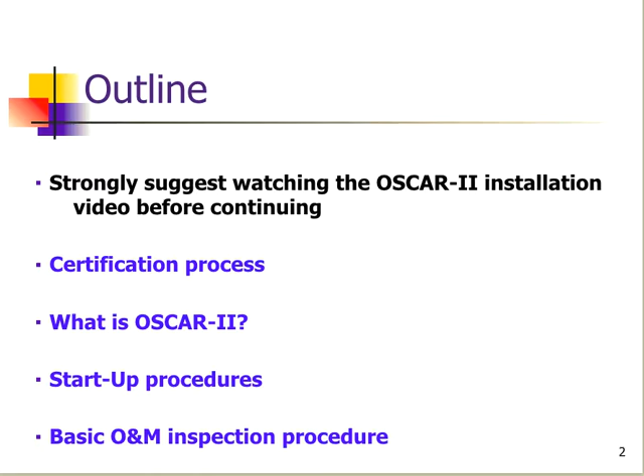If you haven't already, we strongly encourage you to watch the Oscar II installation video before continuing. If you've seen that video, we'll outline the rest of our presentation today: the certification process for becoming a certified professional on our list, what the Oscar II is, startup procedures, and basic operation and maintenance procedures.

The certification process starts with a classroom or online training. Once you've completed that training, your name will go on the list of what we call the certified professionals, which we'll then post on our website. We typically, though not always, try to go through the first operation and maintenance inspection on site or in the field.

Sometimes we do this over the phone, or by FaceTime, whatever the case requires. After that, any additional training needed, we're always available for phone calls and emails. Sometimes we'll work through texting pictures back and forth, then a phone call, depending on the circumstance.

Now, once you've completed this video, give Lowridge a call. We'll have a brief conversation, may emphasize a few things, and answer any of your questions. At that point, we'll gather some information from you, put your name on the list, and get that posted, and then we'll start.

When we post it on our website, you'll find it under the heading of Certified Professionals. The list will look like this. We'll put it in alphabetical order by last name, and also identify the county you're located in. That's not a requirement or limitation of where you can practice, just to give someone a geographical idea of where you're located. We'll list whatever phone number you'd like for contact, and check off whether you're operation and maintenance, installation, or sometimes both.

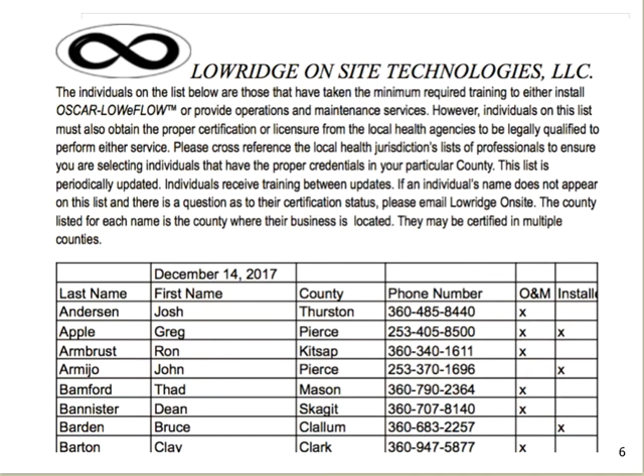Now, to get into what the Oscar II system is, it's a very basic technology with only a few components. We usually start with a 1,000-gallon treatment vessel, a 1,000-gallon pump chamber, a reverse flush headworks located on top of the pump chamber, and then the Oscar drain field or disposal component as the fourth item.

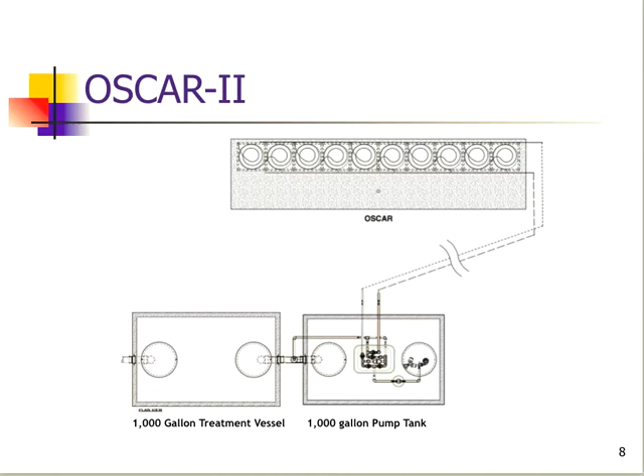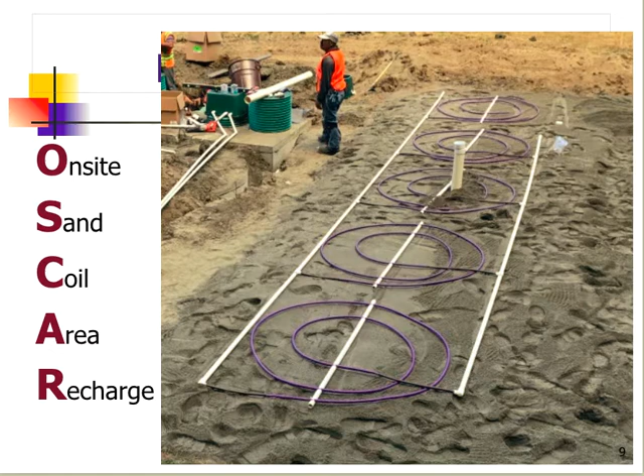The name Oscar is an acronym that stands for On-Site Sand Coil Area Recharge, and it actually describes what it is and what it does. In this illustration, you see an Oscar that is almost complete. We'll just need to put the cover sand over the top here to finish off its installation.

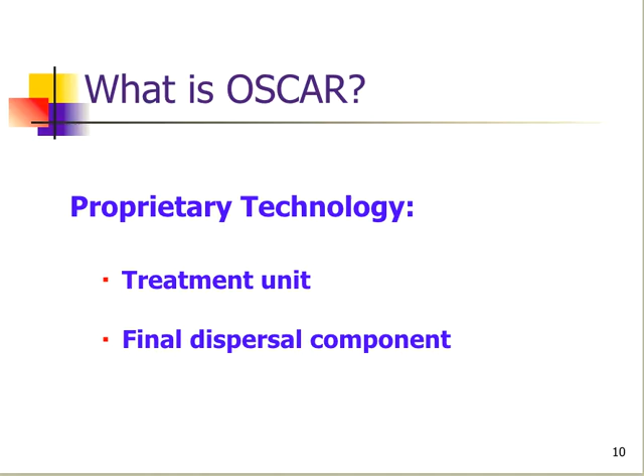The Oscar is a proprietary technology that treats wastewater and also serves as a final dispersal component in one unit. The Oscar actually has two main components: we have our pre-assembled coils, available in a 50-gallon-a-day version and a 100-gallon-a-day version.

We'll also have either C33 sand, or in some jurisdictions medium sand. Depending upon the criteria, we may have as little as 6 inches of sand under the coils to as much as 12 inches, again depending on local requirements.

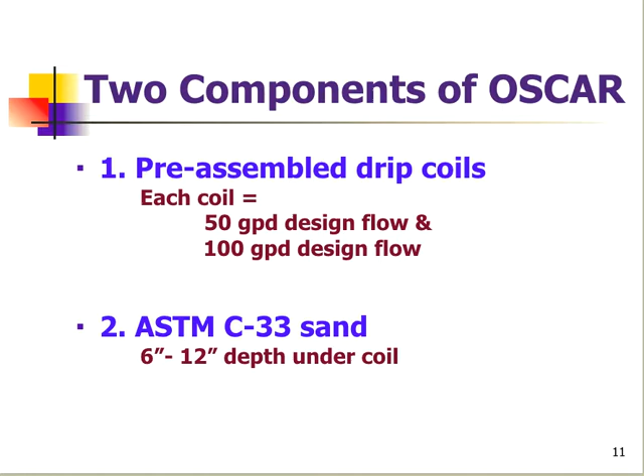When the Oscar is installed, the cross-sectional view will show a layer of sand on a prepared ground or basal surface, with 6 or 12 inches depending on local criteria. We'll have a coil—in this case the 5-foot coil—and then a minimum of 6 inches of sand over the top. We also have a couple of inspection ports for operation and maintenance observations.

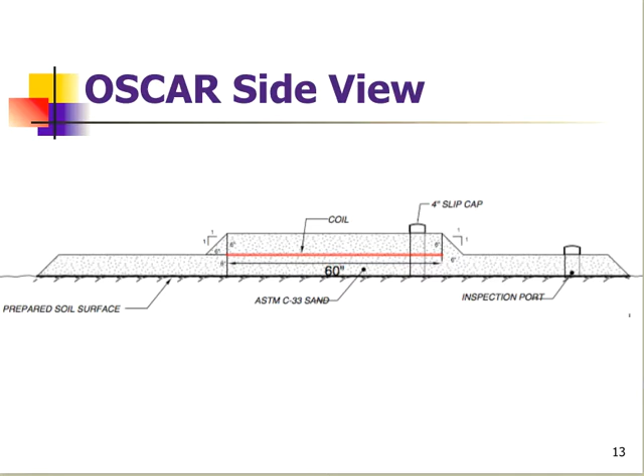Now the treatment vessel, depending upon the locale where you're in—for instance, in Washington State, we would use a treatment vessel that's another treatment technology. In other states, it could be as simple as a single compartment septic tank.

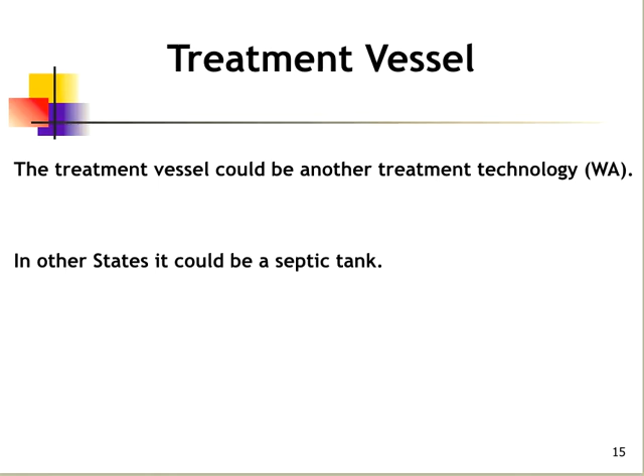The discharge tank, at a minimum, is 1,000 gallons. We'll have a single pump in there with 2 floats. Pretty simple, pretty basic arrangement. We'll go into the details of placement and setting here in a little bit.

Now it's important to understand the startup procedures. This is the process we'd go through once the system has been installed and wiring has been completed—a quality control check to make sure the wiring is completed and we didn't have any broken or misplumbed pipes. But it's also an important process from an operation and maintenance standpoint. If someone went through the startup procedures, it would identify problems either with a valve being bad, a miswire, or some other hydraulic issue.

So we're going to start with the startup procedures first. As we do that, we'll be checking the wiring on the floats, pumps, and valves, making sure those are done correctly, and then we'll also be measuring and recording the flows and pressures through the flow meter and our pressure gauges.

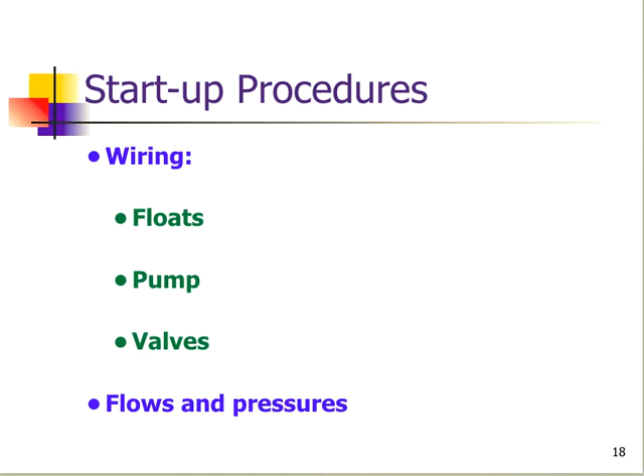So doing the startup will help us diagnose problems with the system. It's very easy once we know what's supposed to happen in a properly functioning system. If we don't get those proper indicators, it actually gives us an indication of where the problem is and what to look at.

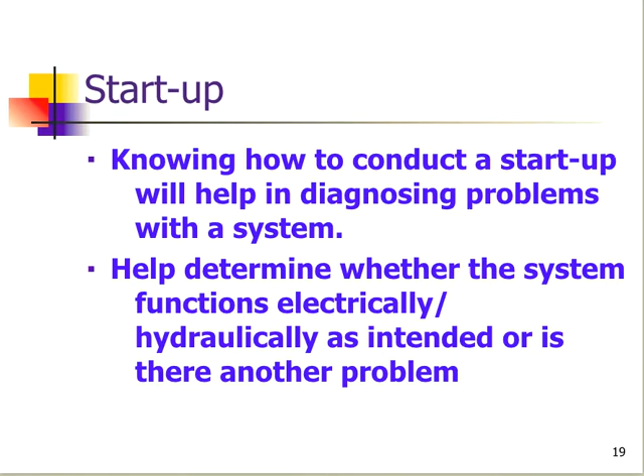So the float wiring—we're going to be looking at 2 aspects. One is proper wiring connections inside the panel, and the other is proper float positioning within the tank itself.

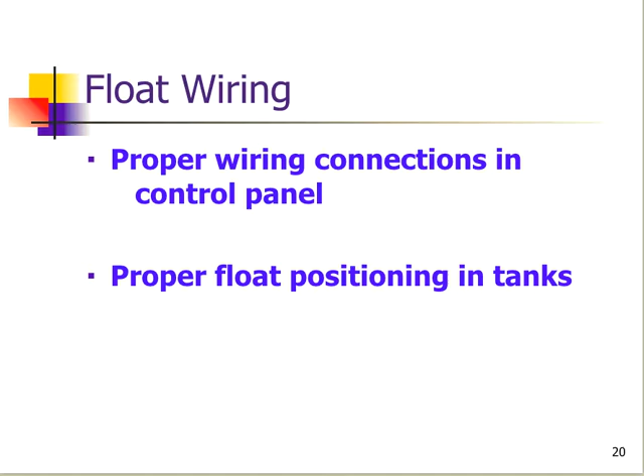And the floats—we have 2. You can test the floats in 2 ways. One is just to raise the floats. For instance, if we lift the top float and hold it for 5 seconds, we'll get an alarm, since there's a 5-second delay. We can raise the bottom float and wait a few minutes, and the pump will cycle. If for some reason the pump isn't wired correctly, or we don't have power to it, you could be standing there for quite a long time holding this float up, waiting for it to cycle.

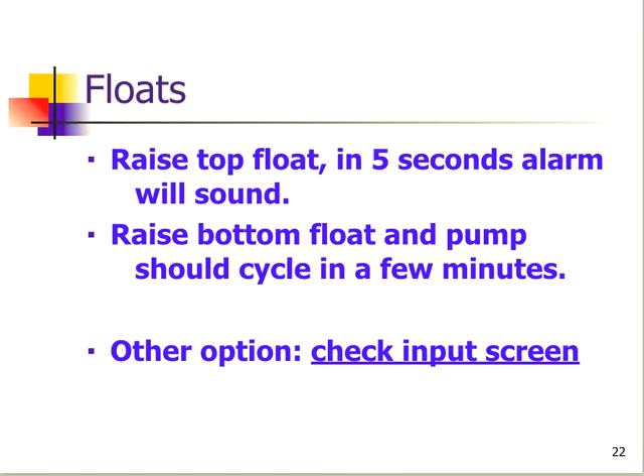I prefer to use the input-output screen option to check the float positions.

In our control panel, we have what we call supplemental wiring diagrams that show how the floats are supposed to be wired. In that bus terminal, the first 1 through 4 are for the floats, and the diagram shows us the bottom float, which is in the lower position, will be wired to number 1 and number 2. The high level or top float, which will be higher than the bottom float, will be wired in positions 3 and 4. We also indicate what input those floats represent, and we'll show you what that means in a minute.

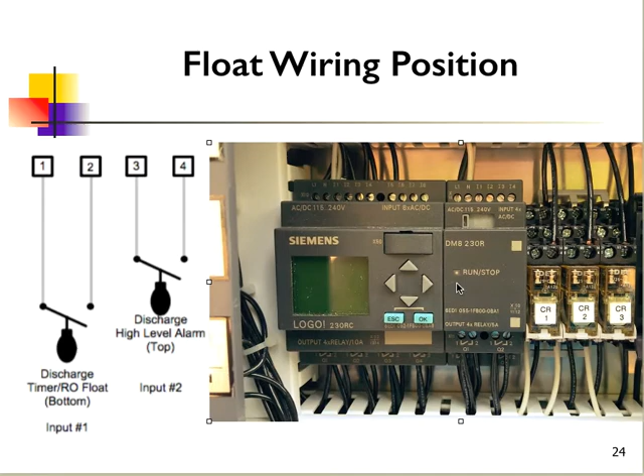So here we have on the left our wiring diagram. On the right, we have the Siemens LOGO!, and the power is off. So if we cycle the power off and turn it back on, we'll get a little indicator light that will start to come on as soon as we turn the power on. Once we get adequate power, this will turn green.

Once it turns green, the first screen that always comes up is the pump cycle and pump runtime screen. Pump number one is our discharge pump for the Oscar system.

When we scroll down using the down arrow, we'll scroll down about 4 or 5 screens, and we come to this date and time stamp. It's flashing, but it doesn't matter if it's set.

Then we use the left arrow, indicated here, to get to the screen where it has the large capital I in the upper corner. On this top row, we're only concerned about inputs 1 through 5.

Number 1 represents the bottom float, and you'll see that it's backlit. That indicates that on this system, that float is up, or the float switch is closed.

Indicating that if we have the bottom float up, that's in the right position. Input 2 is the top float, and in this case that top float would be hanging down, so this would be in a normal condition. We have a bottom float that's up, we're waiting to dose. We don't have an alarm condition, so number 2 is not backlit.

Now our float positions within the tank: we want to have the bottom float at or above, usually above a few inches, the top of the pump. We want to make sure that the wet end on top of this pump is always submerged.

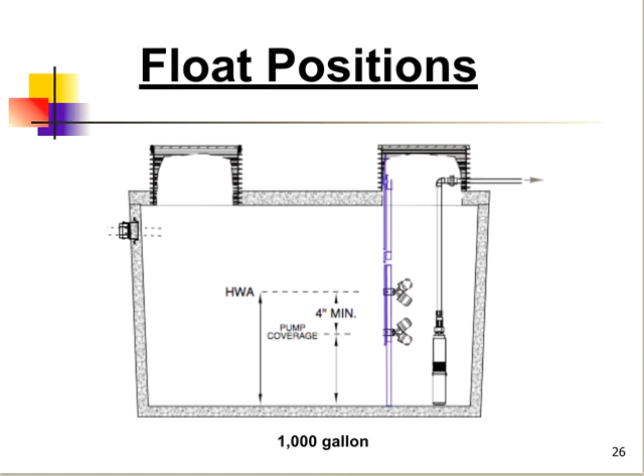Now our reverse flush headworks actually keeps the Oscar coils operating and clean automatically. We use this headworks with 5 valves, a disc filter, and a number of pressure gauges to indicate proper operation. This headworks was not configured so that it was simple to know how it operated, but it was configured so that it would fit in a relatively small valve box and still be serviceable.

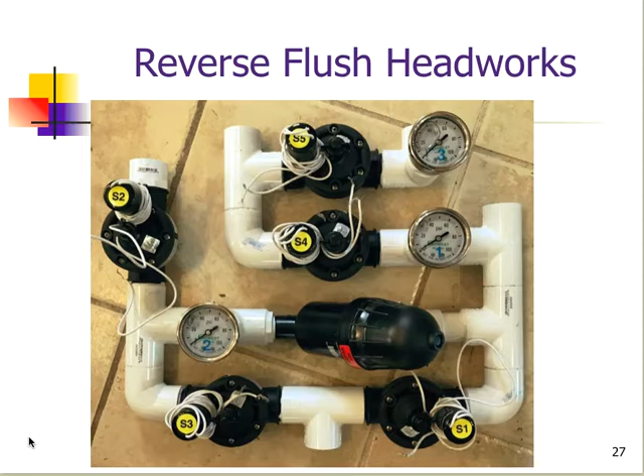So a little information about our headworks: the standard for a single family residence is going to have a 3/4 inch disc filter. That disc filter is about 120 mesh, or the equivalent of 130 micron opening size. We have 5 normally closed solenoid valves and 3 pressure gauges.

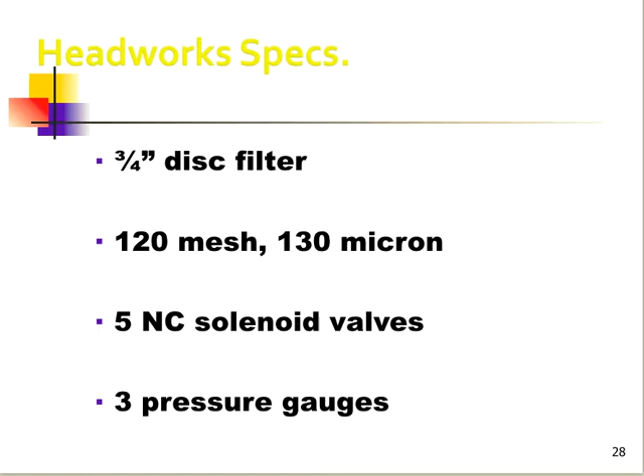Now these solenoid valves are not irrigation valves, they are made for sewage application. All these valves are normally closed, which means in order for water to flow through the valves, we need to have both electrical impulse at 24 volts and at least 15 psi to open the valves. I think it's actually more like 8 psi. In any event, we need to have the pump running and electricity to the valves to get them to open.

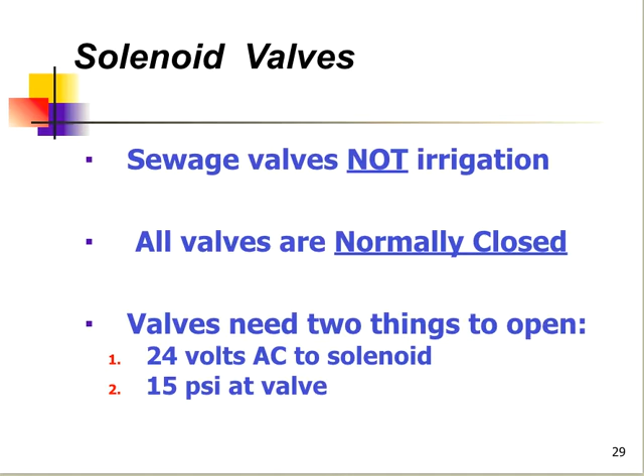Now the valve hardware is coordinated with the firmware in the control panel to give us what I call 3 valve functions: V1, V2, and V3. V1 is our dose, that's what we'll be dosing the Oscar. V2, or valve 2 function, is going to backflush the disc filter, and V3 is going to be a coil flush to clean the coils out, and then we repeat the cycles starting again with valve 1 or V1.

Our default setting gives us 90 doses, and our dose cycles are going to be 3 minutes 38 seconds off, 22 seconds on. We're going to do that 90 times. After the 90th time, then we'll go to V2.

We'll have a short rest, and then we'll backflush that disc filter for 15 seconds. Then we'll have a short rest of 30 seconds, and then we'll flush the coils for 2 minutes. Once that's completed, we'll go back to 90 dose cycles. And as long as there's water available and our timer on float is up, those cycles will continue in perpetuity.

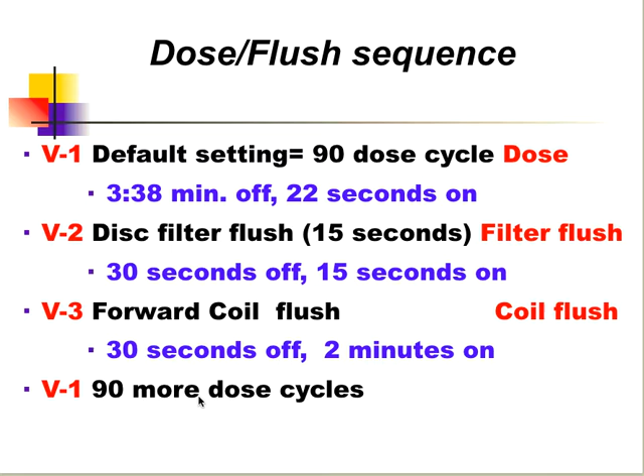Our valves are going to be wired between the 2 yellow tabs. Our supplemental diagram looks like this. We label the solenoids or the valves as solenoids 1 through 5.

Each solenoid has two wires or leads. One wire from each solenoid is tied together in one common wire, which goes back to the control panel in V1 or VN position. Solenoids 1 and 2 operate together, so they're tied together in common for valve position 1. Again, this will be our dose cycle. Valves 3 and 4, solenoids 3 and 4, work in parallel. They're tied together, and that's our disc filter backflush.

And valve 5, or solenoid 5, is kind of an outlier. It operates in conjunction with valves 1 and 2. So V1 and V3 operate together when it's time to do the coil flush.

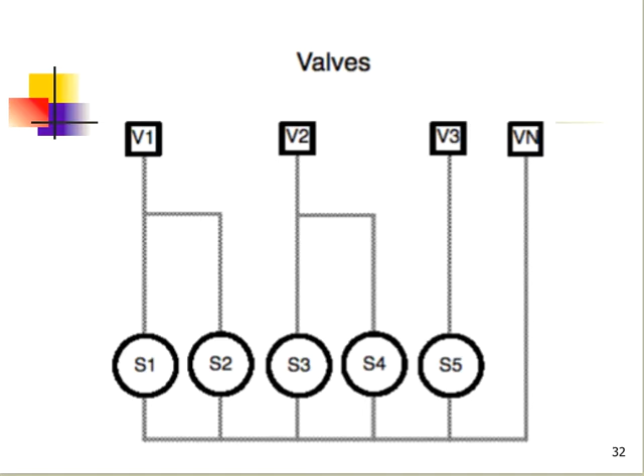Here's how we'd go through and manually operate the sequences to validate the correct wiring and hydraulic flow. First, we would turn our pump on. We've got 4 toggle switches in our control panel. The top one is pump 1. Turn that to manual or hand. And then again, we need to get power to our valves 1 and 2, so we're going to put that toggle switch to hand.

When we do that, the pressures on our gauges, we should expect to see gauges 1 through 3 have virtually the same pressure in a very narrow range of somewhere between about 48 and 52 psi.

Now the flow, depending upon the size of our Oscar system, will dictate the actual flow of the emitter discharge rate. The more coils we have, the bigger the flow will be. Our OS50 coils, or 5-foot coils, each have a flow rate of about 0.35 gallons a minute. So if we've got 10 coils, we're going to have about 3.5 gallons a minute. At least we should be able to verify or look close to that.

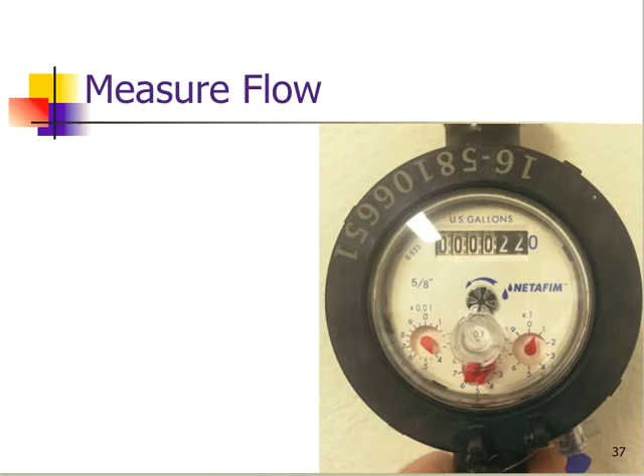Now to measure the flows, we use a flow meter. It's the most accurate way to do that. The flow meter that we use for the standard system is a 5/8 inch filter or flow meter made by Netafim. You'll notice we've got somewhat of an odometer reading on the top, but we have 3 dials.

One dial measures each digit will represent 1 gallon, so one full rotation of this dial is 10 gallons. This dial is 0.1, each one of these digits will represent 1/10 of a gallon, so one full rotation here would be 1 gallon. And on this dial, it is 0.01 gallon per digit, so 1/100th of a gallon. So each rotation here would actually be 1/10 of a gallon.

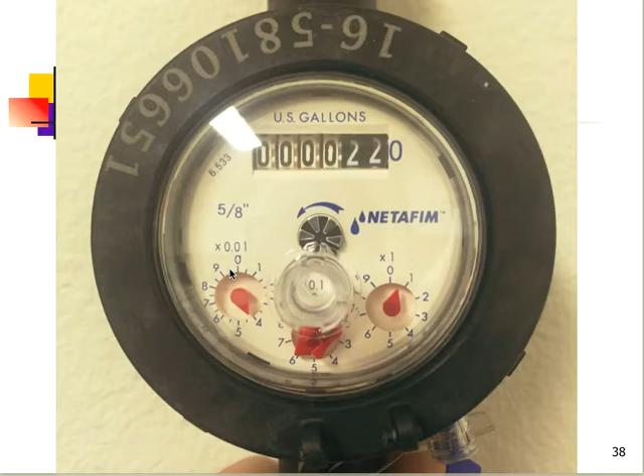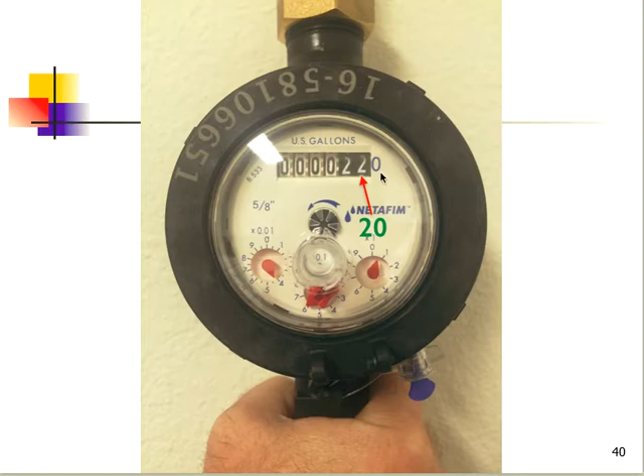So when we're reading this, the first black background number is actually 100 gallons. The next digit is the tens gallon, so 220 gallons. And because we're between 0 and 1 on the single digit meter, we're going to just use that as 0. So if we were going to then record what this dial actually said, it would be 220.6 -- we're putting 6/10, 4/100ths of a gallon.

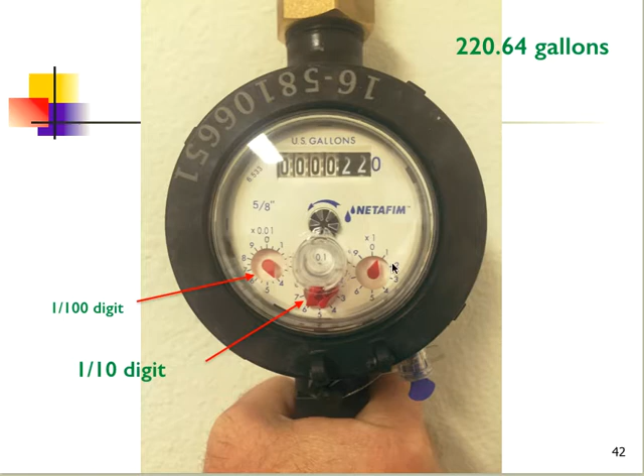Getting down to the hundredths is not important, but it just indicates that's how we read this meter. These first 2 digits are 100s and tens. Single digits will be read off of this meter, and tenths off the middle meter.

Now what that means is when we're actually going to measure the flow, we don't have to do any math. We simply turn on the pump, turn valves 1 and 2 to manual or hand, and let the system pressurize. Once we're not gaining any more pressure, we're at about 50 psi, all we have to do is count the rotations of this middle dial. Each rotation is 1 gallon. So with our smartphone, in 1 minute time we count the number of rotations, and that's our emitter discharge rate or flow. So it's very easy to verify.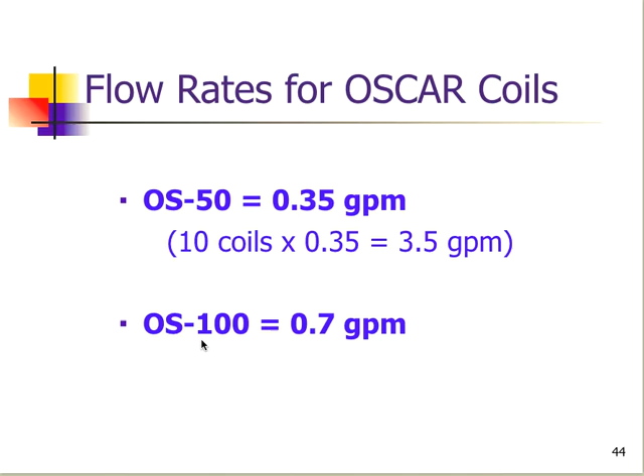Now, once we've verified that valves 1 and 2 work, we need to test the backflush. Our disc filter's normal flow is once water comes into the disc filter housing, it flows from the outside of the discs to the inside and then flows from the center of the disc out to the coils. So what we're going to do is reverse this flow and put all the pressure and flow on the internal portion of this disc filter.

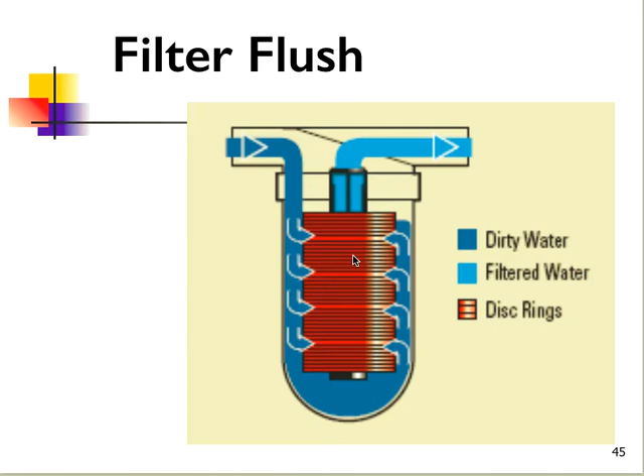To do that, we're going to need hydraulic pressure, which we turn pump number 1 on. And then valves 3 and 4 we're going to energize. Valves 1 and 2 and 5 will be off.

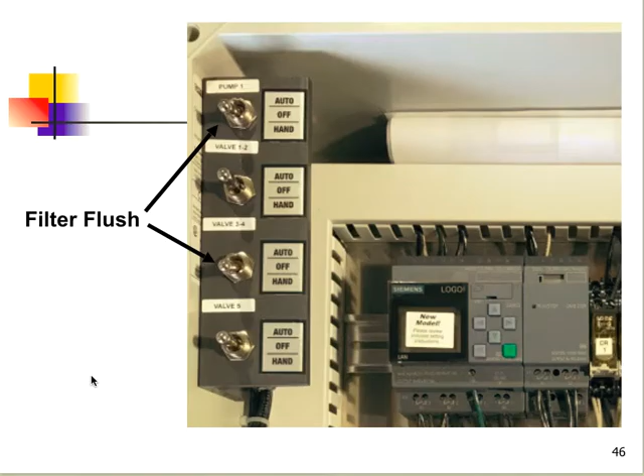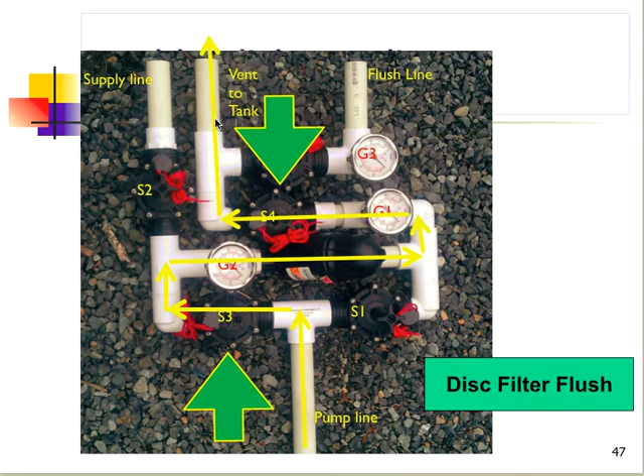So the flow through our headworks will be represented by this yellow line. We're going to go backwards through the disc filter and then exit what we call the vent line, going back to the tanks. And the flow path would look like so: from the pump, in through the headworks, backwards through the disc filter, out our vent line, and then it doses back into the inlet of our pump chamber.

Now we know those valves are wired correctly when we get these pressures. Gauge 1 will have about 10 psi. Gauge 2 will be about twice that amount, usually around 20. Sometimes these will be 12 and 18, or 9 and 19, something like that, but you're looking at about a 2-to-1 ratio. Gauge 2 will always be higher than gauge 1, and we shouldn't have any pressure registered on gauge 3. That's just a verification that the valves were wired correctly.

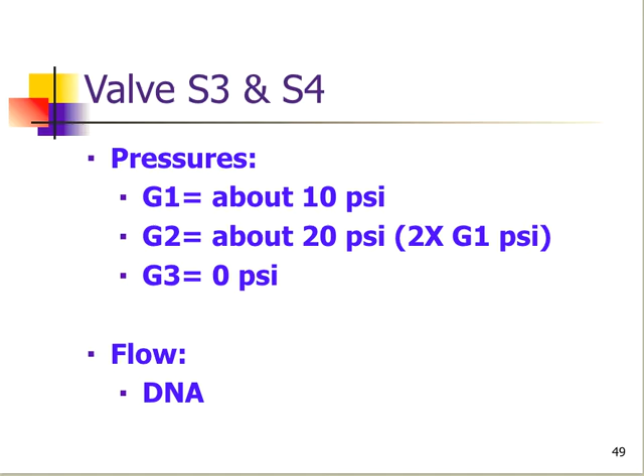The other thing we'll notice is the flow of water coming into this tank will be quite high, about 28 to close to 30 gallons a minute. Again, we're going a very short distance back into the tank, so there's not a whole lot of friction loss that we're going to find here. So the flow rate will be quite high.

Now once we've tested the disc filter backflush, we need to verify that valve number 5, or the coil flush valve, works correctly. So now we're going to turn on pump 1, go back to valves 1 and 2, turn off valves 3 and 4, and turn on valve 5.

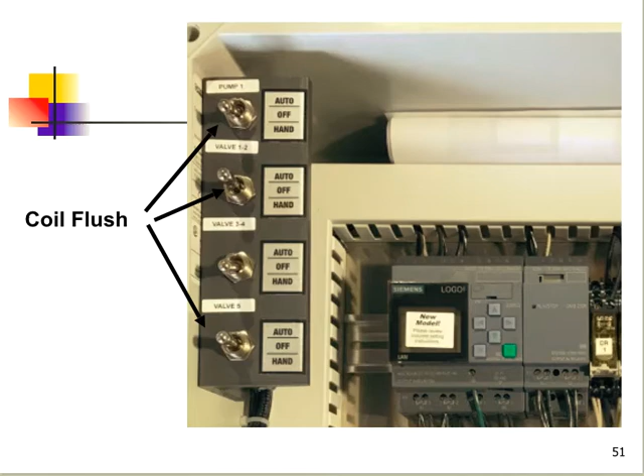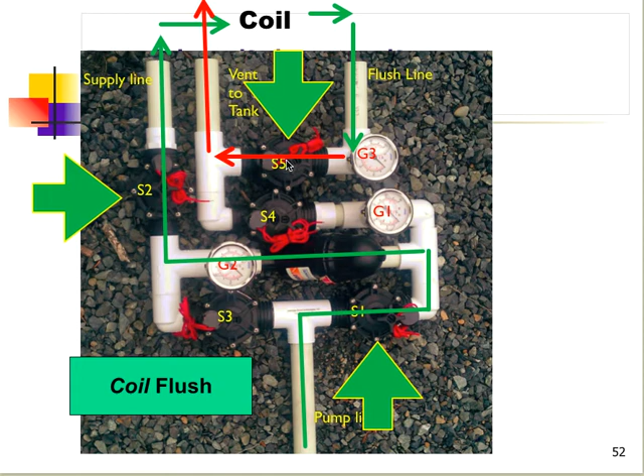Now our flow path is going to resemble the dose, except that we've opened up valve 5, and now we're going to allow that excess pressure to vent back into the tank. This is what the flow path will look like. The flow rate coming in during this cycle will be about half the flow rate it was when we did the disc filter backflush. We've got a lot more pipe, there's a lot more friction loss, we are losing pressure and flow out the coils, so we would expect to see less flow during this cycle than the backflush disc cycle.

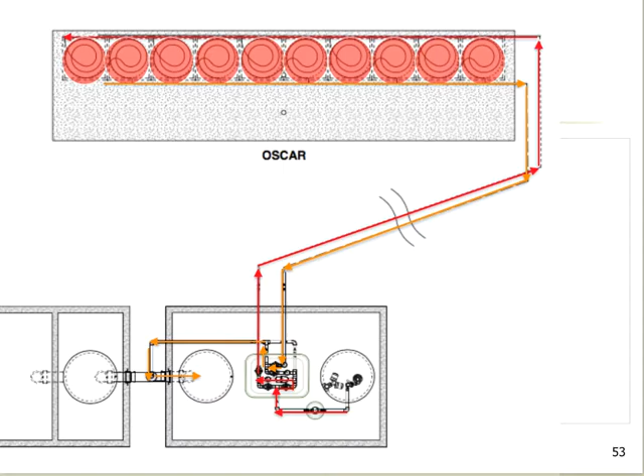We validate or verify that the valves are wired correctly. In this case, we should have about 40 or so psi on gauges 1 and 2, and usually it's 0 on gauge 3. Sometimes the needle may bounce or register 1 or 2 psi, but it's always very low, or 0. If we were to actually measure the flow, we would want to see a minimum of about 12 gallons a minute on the flow.

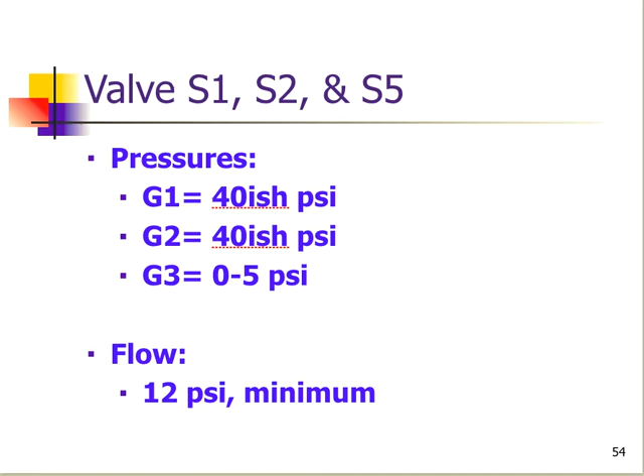So the next question is, what do we record? We've gone through all this, but really we only need 4 pieces of information. We want to record the pressures on all 3 of the gauges during the dose, and then we want to record the dose flow rate. This is something we want to refer back to in future maintenance to make sure we're properly backflushing that disc filter, the emitters aren't plugging, or we don't have a break in the line. If we have these 3 pressures and the flow from the original dose or setup, going forward we can verify whether our system's functioning hydraulically correctly or not.

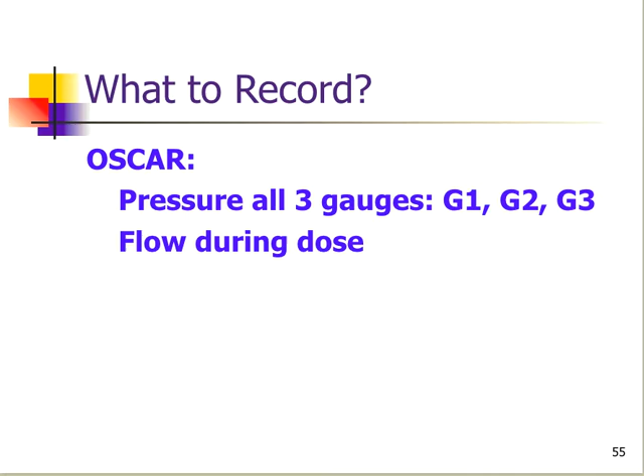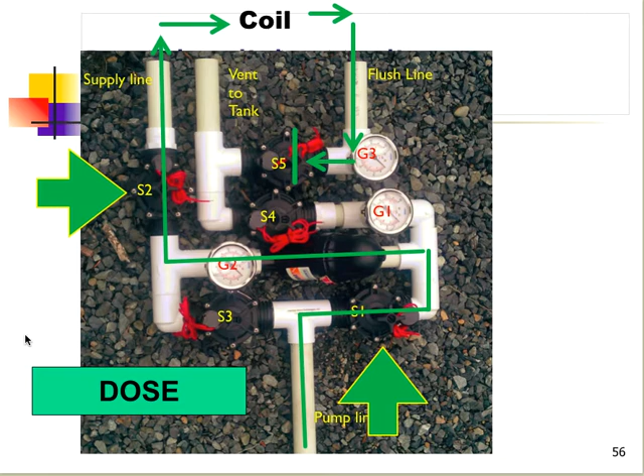So again, on our forward flow, we'll be registering the pressures on gauges 1 through 3. Here's our pressures, and the only variable we're going to have is the flow, depending upon whether we've got 5 coils, 10 coils, 8, and whether they're OS50s or OS100s.

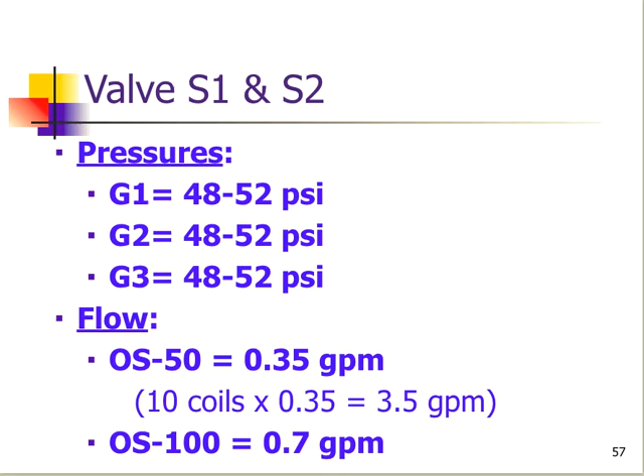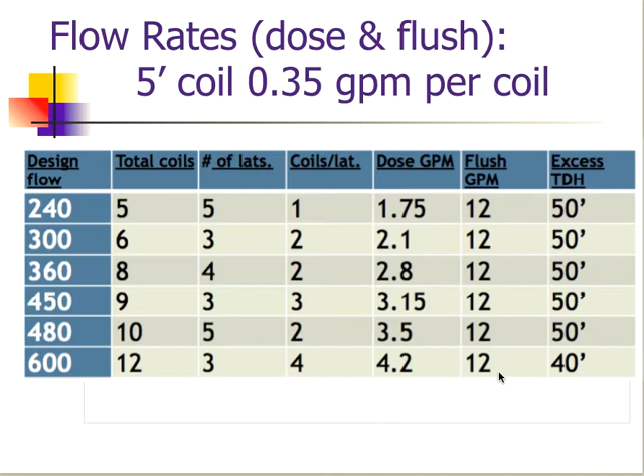If we're not sure or can't get a hold of somebody, we have manuals on our website for design, operation, and maintenance, as well as installation. In all 3 of those manuals we have tables. This one is for the 5-foot coil, and we also have one for the 100 gallon a day coil. It gives a breakdown of how many coils are in that design flow, what that dose flow rate should be on paper, and the minimum flow rate when doing the flush rate.

Basically, our startup is now complete. We know that all the floats, pumps, and solenoid valves are wired correctly. We have validated and recorded the pressures and flows.

It's important now at this point that we put all the toggle switches in the auto or up position, and all the breakers are on. So all you really need to remember is toggle switches and breakers should be left in the on position, regardless of whether the house is occupied or not. It's better to leave those on, that way no one has to remember to turn them on. The system will not run with a low level because there won't be any water to lift the bottom float, so it'll just wait for someone to start using water.

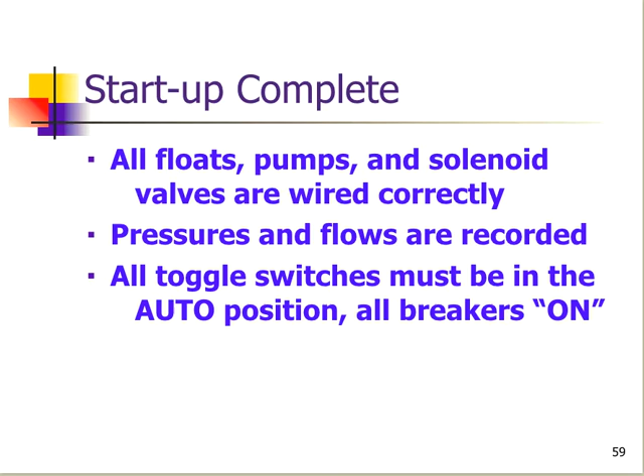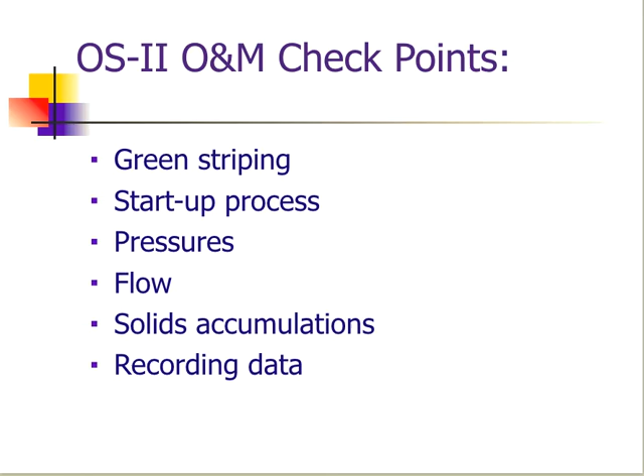Now, the main portion of what we're talking about, operation and maintenance, we really need to look at the entire system. The startup, as you can see, is actually part of an operation and maintenance check. It's probably the most complicated to learn of everything we'll talk about, but it's integral to an O&M checklist. First, we want to look at what I call green striping. Again, go through the startup process, look at the pressures, record the pressures and flows, but we're also going to measure and record solids accumulations in the tanks, and then record all this data.

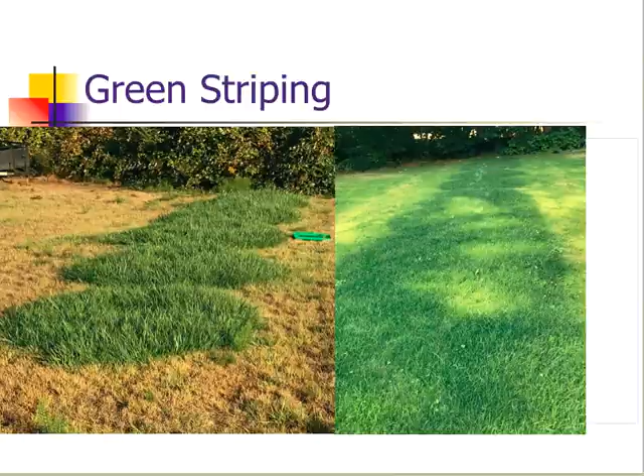This will verify that on the day we've done the inspection, all the electrical and hydraulic functions are good and working properly. If for some reason when we do the startup process we're not getting the proper pressures and flows, that will point us in the direction of where the problem is.

Once we do that, we're starting to get into troubleshooting, and we have a whole bunch of steps written in our operation and maintenance manual, which is posted on the website. At this point, you're more than welcome to give Lowridge a call, and we can walk you through a couple things to identify where an issue may be, if we're not getting the proper pressures and flows we expected.

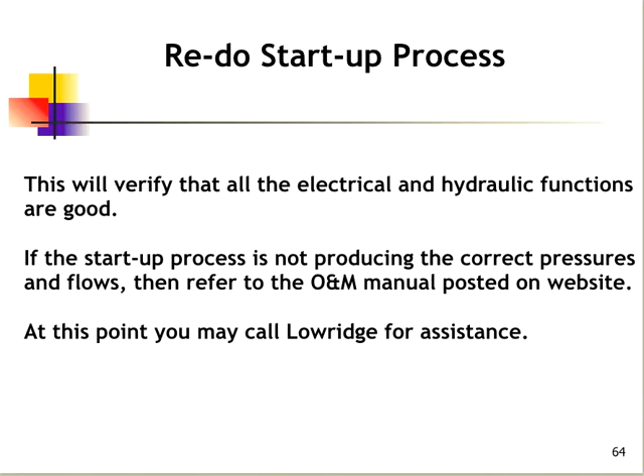The treatment vessel, again, depending upon the jurisdiction you're in, if it's a simple septic tank, you'll probably want to have the tanks pumped when about one-third to one-half of the vessel is full of organic solids. If you have an additional treatment unit ahead of the tank, you probably want to follow that technology's requirements for operation and maintenance.

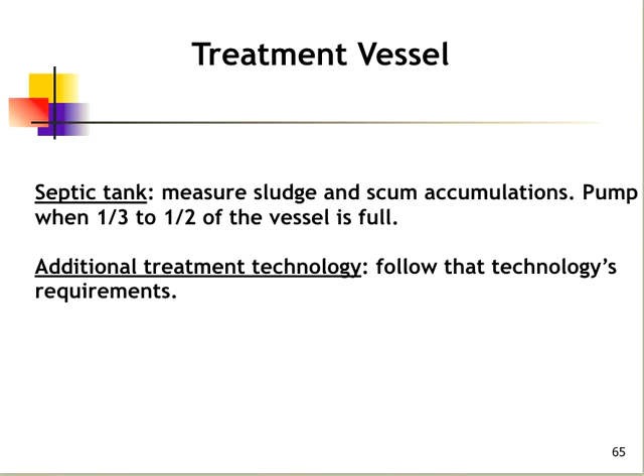Now, in the discharge tank, we do want to measure for solids. Once they start accumulating up to the intake of the pump, it's probably time to waste off these solids. Depending on the circumstances and what you're allowed to do, you may be able to put a small centrifugal pump in here and pump off a good portion of the solids into the septic tank or the treatment vessel. In other cases, you may need to just evacuate the tank and haul everything off.

You will see some light film accumulating on the top surface of the water. That would be normal and not a big issue. Again, we want to really look at the liquid itself - as long as it's clear and not too cloudy, that'd be fine. This depends on whether we've got a treatment vessel, another technology in front, or whether this is just septic tank effluent.

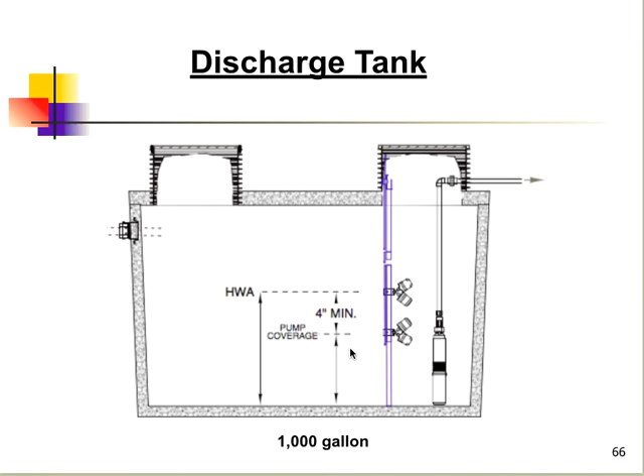Again, state your observations. The other thing we want to do is record the pressures during our dose cycle, record the flow rate during the dose cycle, and then record whatever solids accumulations we have in the tank, and if any functions were done - if we've cleaned the filter, if we had things pumped - we would want to record that information as well.